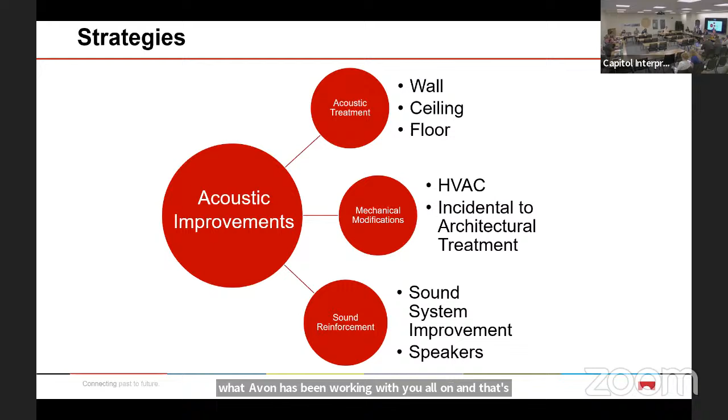If we add a treatment option to a wall or ceiling, there may be incidental repairs necessary to accommodate the new treatment. We also have sound reinforcement, which is a lot of what Avant has been working with you all on—sound system improvements, as well as some speakers we'll be showing here today as added to spaces.

One thing to get out up front: the goal of this workshop is to define the scope of work moving forward. We've outlined three key points to keep in mind. The first is we're able to utilize different pots of money to address different scopes of work, simplifying the number of rooms addressed in this workshop.

We'll go into that in more detail in the following slides, but Wendy already addressed that major maintenance is a pot of money that allows us to remove some of the rooms we had included in the report as a separate budget item.

The second key piece is the design team's recommendations have included considerations of acoustic performance, invasiveness, and impact. While ceiling treatment may require more invasive installation, it will have less impact in the long term. Again, the ceiling has the greatest impact on acoustics, and also the greatest impact on installation, since the ceiling has everything from lights to various mechanical and electrical systems.

Those systems would be incidental to what we installed, so that would take work, but over the long term it would pay off in benefit to the room. A third thing to note: if it's imperative that a reduced scope be considered, we advise completing fewer rooms per our recommendations rather than implementing partial solutions in many rooms. Rooms in which public business is conducted should be prioritized—we'll get into that more in the following slides.

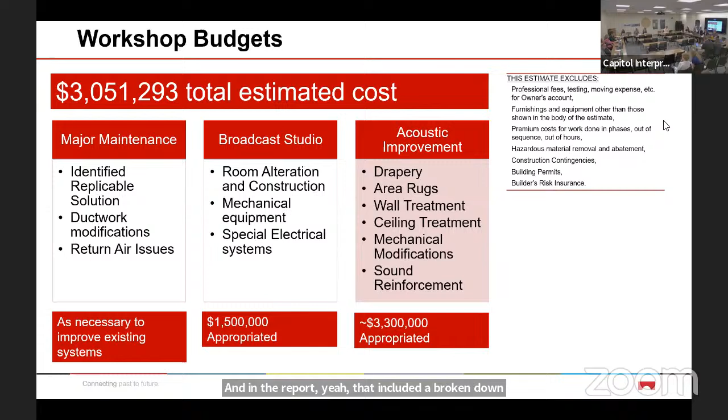So the major maintenance mechanical items, here are the list of rooms we were able to pull out of the report and begin to include that in a separate pot of money moving forward. We estimated this about 800,000 of that 3 million can be moved to the major maintenance fund source. Now, something important to note here is that all these cost estimates are adding in a 25% premium, just with the assumption that this may not happen all at once, but could be incrementally pieced together.

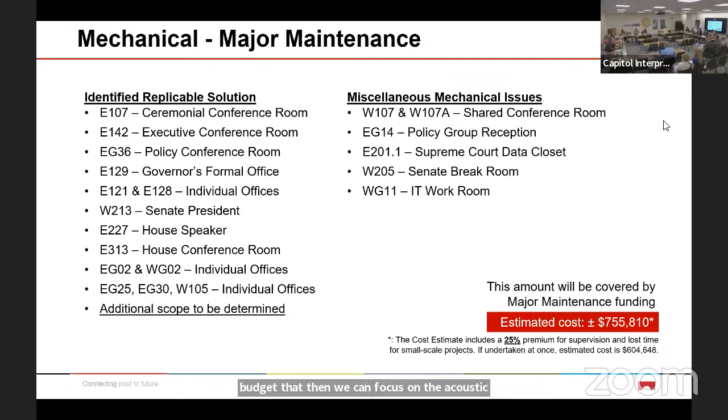So the next pot of money is that broadcast studio budget. This is another separate appropriation. Something to note here is that a lot of the design work is still yet to be done.

So we've taken a very basic approach to this space so far, without including any type of equipment that's special to the broadcasting studio. Our estimate included in that comprehensive report does give an item towards it, about 400,000 so far, but our estimated cost we're presenting here today is just going to be determined pending the scope moving forward.

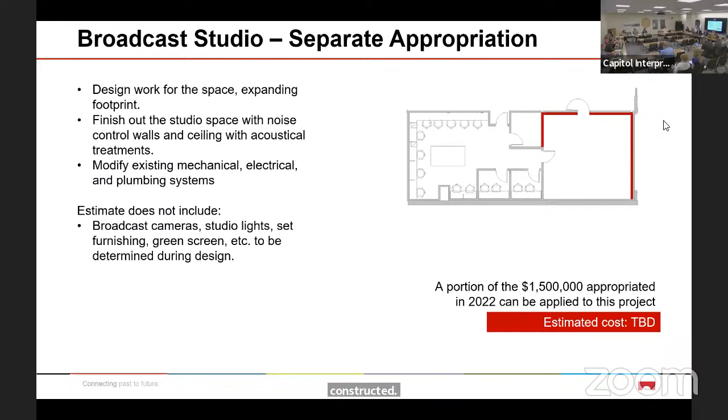But as we understand, it is a sure goal of the state that the broadcast studio is going to be included, designed, and constructed. So as we move forward with that design process, we'll be able to present a more conclusive cost estimate.

Which brings us to the acoustic improvement. The goal of this workshop here today is to go through these rooms.

In talking about the acoustic improvement, one thing we need to consider is the net impact of our treatment options. Our treatment options are things like the wall, ceiling, and drapery that we've talked about and shown in our benchmarking.

So when looking at a specific room, potentially stepping incrementally towards an acoustically sound room, doing something as small as drapery and rugs is not going to make as much of a difference. It's not going to have as much impact as, say, the wall or ceilings.

In many of the rooms we're going to talk about today, we're going to recommend doing just the ceiling. There are a few rooms where we do recommend each one of these be undertaken at once. But primarily, as I said earlier, our recommendation is going to be a complete system as opposed to a partial system in many rooms.

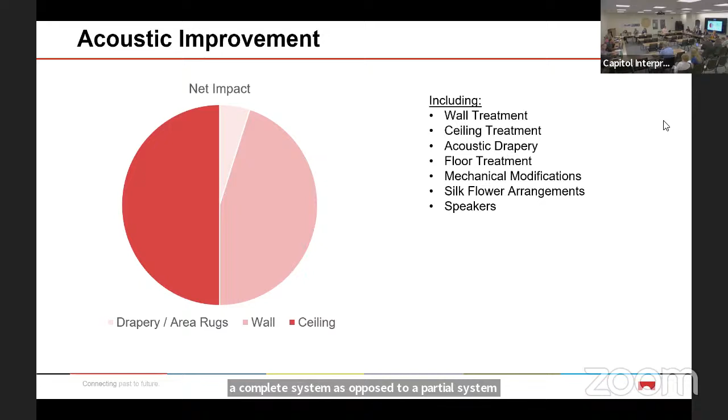So with that, the goal is to get as close to the ideal acoustics as practical. We'll have some slides in the future that Avant has put together, and if you remember in reports past, they had put together graphs showing the recommended target acoustics and the different lines of different options we had examined in the past.

Moving forward to conclude with our final recommendation on how to achieve the ideal acoustics, which may not be perfect—and that's something important to consider too, as we'll see in future slides. It may not be perfect, but it's going to be that balance that Todd mentioned earlier, where we're balancing quality, scope, and budget.

So to begin, we'll look at the Joint Appropriations Committee room. In this room, we have presented wall treatment, furniture mounted drapery, speakers, and then all the other incidental engineering building system modifications. So that room comes in at a cost of about $57,000.

And this is including all of our recommended acoustic treatments. So if this is all undertaken, again, that's what the rendering will look like, which we can hop back to if you would like.

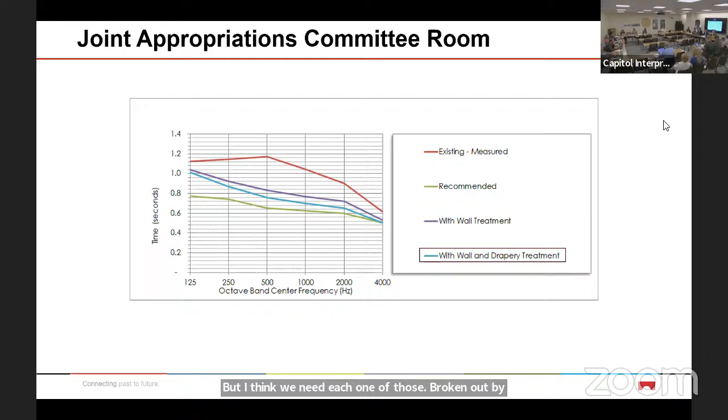So the next place is again the public meeting rooms. For these ones, we are recommending only doing the ceiling treatment.

Wall panels were presented as a potential option here, as well as window drapery. But this is one of the cases where ceiling is going to get the most bang for your buck. So while it is the most invasive option, you're going to have electrical, speakers, different modifications that will need to be made to the ceiling to accommodate the treatment.

In the long run, this frees up wall space. It's out of sight, almost out of mind, and it will be detailed in a way that you would hardly know it's there. And many of the benchmarking examples, I'll go back to some of these.

And so that's primarily why we recommend doing a ceiling when the option's available, because it becomes unnoticed in the long run. You'll have the impact on the acoustics, but not the visual impact you would if it were mounted on the wall. So here are the different options we looked at for that room and why we went with the ceiling treatment.

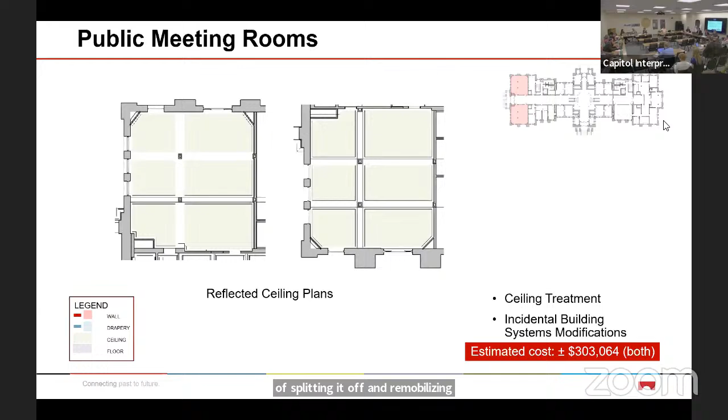So the wall treatment and ceiling treatment were for getting the square footage, the area of absorption required for the recommended reverberation time. The speakers were to increase sound intelligibility, and the railing modifications addressed reflection coming off the existing glass railings - non-historic but maintained - by replacing them with brass railings similar to those in the historic Supreme Court and elsewhere in the Capitol building, to remove that reflection coming from the gallery space.

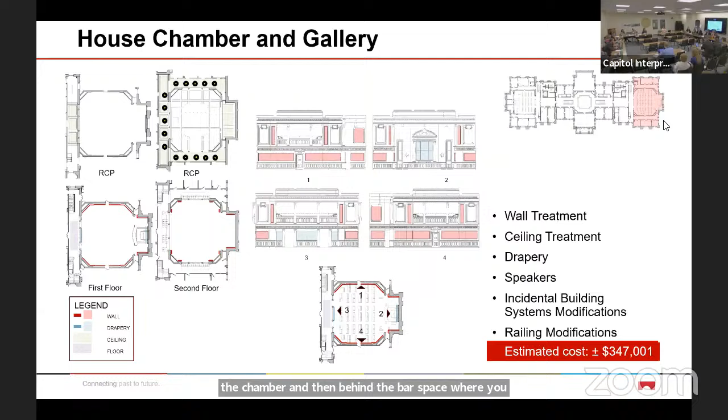And John, this is something you had - well, there had been some comments on seeing people on camera back there talking, and it being kind of distracting to the Zoom calls, the feed to the internet. So you could shut those curtains and not see them.

And it was our understanding, and Brandon, correct me if I'm wrong, that there was not a security issue. It wasn't like it was ballistic glass or anything like that. It was primarily an audio control component, or voice.

Yeah, Mr. Chairman, Representative Sherwood, it was actually debated quite a bit during the Capitol restoration project, and the glass itself doesn't provide any fall protection - if you leaned into it too hard, you would fall. The thought behind it was it provides perhaps a little bit of protection, since there have been instances in other states where people wanted to dump something into the chambers, but you could still reach over and do that even with the existing glass. And behind the bar area, during session, is controlled by the sergeant at arms and the doorman.

So I've got a couple of thoughts on that area we're talking about, one of my favorite areas in the Capitol. I think it's really impactful when you come through that first door and into that area. So I'm going to have to see where we would propose these draperies, because I really like that you can see through into the chamber, and closing that off in any way gives me a little pause. Maybe I'm the only one.

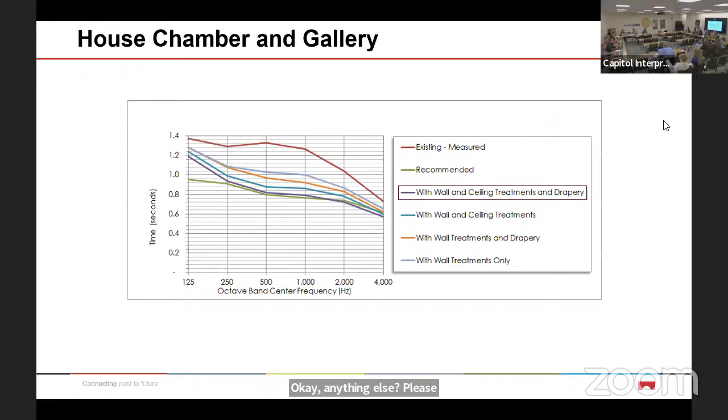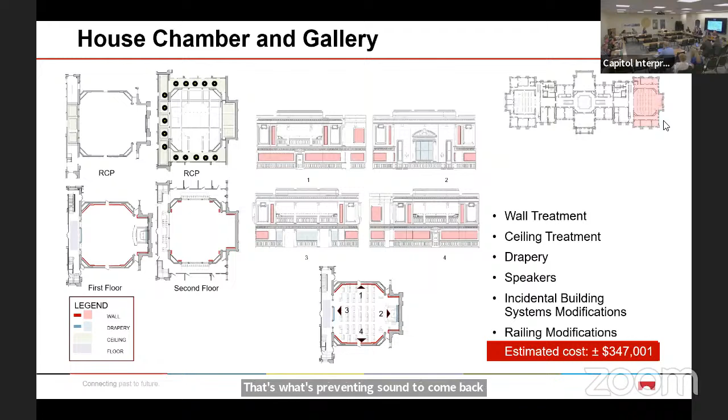This is one of the spaces where we considered options. This is definitely a recommendation, but if the drapery weren't installed, this is one of those where the ceiling should then be utilized for absorption. We believe this is the most prudent option. It's going to be the least invasive. It's just going to be a railing with the drapery hung from it, mounted behind that on the face of the wall in a way that isn't destructive to the architecture of the building, but it serves a crucial purpose of blocking those sound waves and helping prevent additional reverberation in the gallery space.

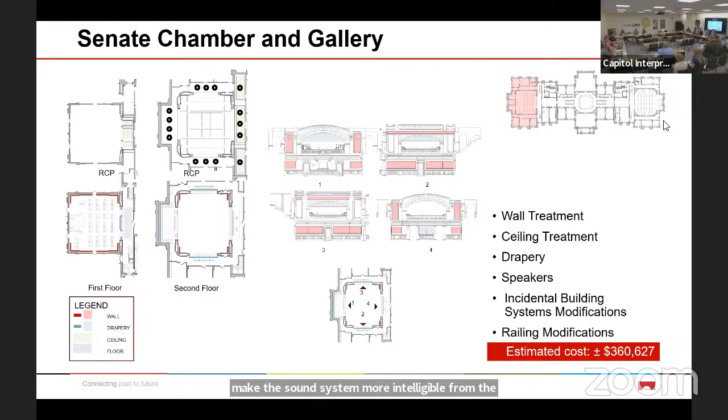Anything, committee? Okay, please proceed, gentlemen.

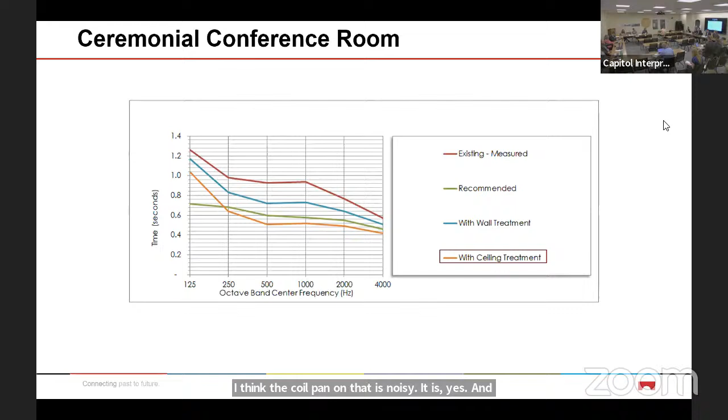I think the coil fan on that is one of the noisiest ones. It is, yes. And so that is again, maybe this is part of the discussion, but the major maintenance funding - this estimated cost, I believe, includes this room's major maintenance item. It hasn't been separated out in this estimated cost. So something to think about is that this may potentially be lower for the ceiling treatment option, but it does, in this case, include that replicable solution we've identified as a major maintenance item.

So in reference to that, we've got the two fan coil units in there. Does major maintenance go beyond that? Is there something that I'm not remembering in that room? They would be addressed in major maintenance. Yeah, that is our understanding at least.

Anything else, committee? Okay, please proceed, gentlemen. Thank you.

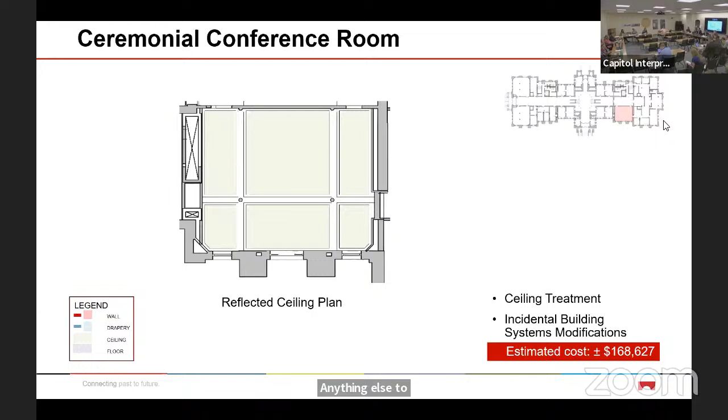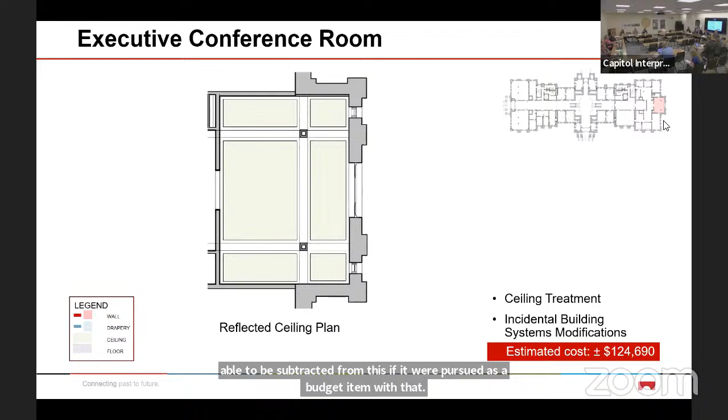Just further analysis showing that the ceiling treatment, while it performed almost as well as the wall treatment, this is one of the ones where it's basically a one-to-one choice where you're deciding, do I want to impact the wall, do I want to impact the ceiling? In this case, wall was used for picture frames, artwork, and everything else that would actually detract from the treatment. So this is assuming that the wall treatment is unimposed - it has the entire area for absorption, where the ceiling you wouldn't hang anything necessarily. So it achieves its acoustic value without impact from anything that would be added on after the fact.

Wendy, how do you envision this? Obviously the governor's office would have the sole determination on when and how to do it, if they want to do it. So how soon do we bring your office in as we do these evaluations, so that we're in sync? And with the chambers, I think it's the same thing. Essentially, that would be a management council call and the respective bodies' call on their individual chambers to some degree. At some point, obviously we need to give them a presentation, and so what we do is make a recommendation to those entities. Is that what you envision?

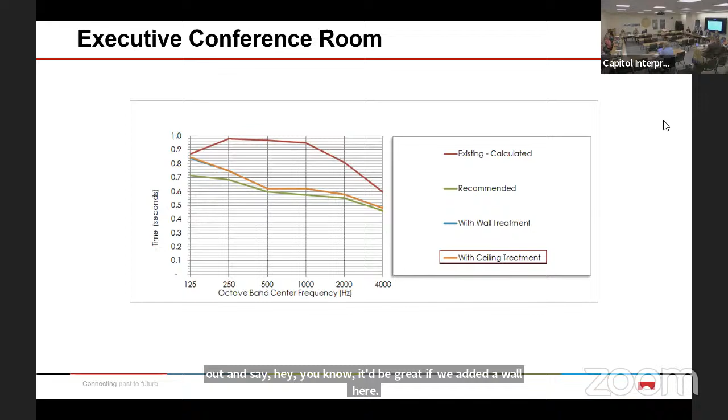The portion of statute that triggers the notification and involvement of management council and SBC is 9-5-106 E or F, I can't remember right offhand. That's the provision that any architectural change to the building - it's meant to protect so that somebody doesn't go out and say, hey, it'd be great if we added a wall here, we could put two offices, and kind of undo the work of this restoration project. So it's a little complicated. To Betsy's point, I think we need to dig in more about what's required, but any fan coil modification is just work GSD is doing in the building - there's lots of trades work at all times, really finish changes. But if you were to add a wall to a room, that's where they're trying to have these governance bodies say, hold up, let's think this through.

Yeah, I think the co-chairman and Wendy expressed that very well. Good points, Betsy, thanks for bringing that up. I would always lean toward the caution side on what we're up to, and I really like how this subcommittee has operated. I hope both branches of government feel that way. We've made good recommendations, but we've been careful to make sure we're going up through both channels, and hopefully we can continue that.

I think whatever we do on this acoustic front, we're going to find that we're limited. So our recommendation has to be to utilize what resources we have to the maximum - we can do that, in my opinion. I'd probably lean the committee toward taking care of the most important rooms that have been outlined today, rather than trying to do everything and spreading our resources throughout the building in areas that maybe don't get the high traffic or aren't utilized as much. So a little later this morning, that's kind of what we need to be up to, to give these gentlemen their next charge.

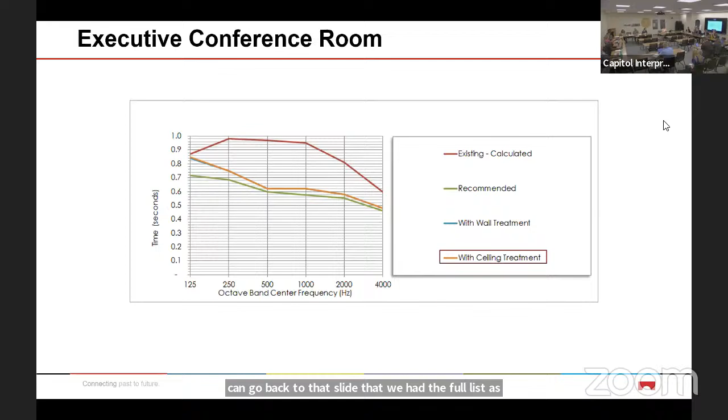We just have a couple more spaces we'll touch on this morning to show the individual estimated cost. Another room is the policy conference room - this is another ceiling treatment only option recommendation, and it's again going to have the incidentals that every other room with the ceiling has had so far. I can go through these a little faster since they're getting repetitive, but the graph shows that the ceiling treatment was the most prudent and thus the recommended option.

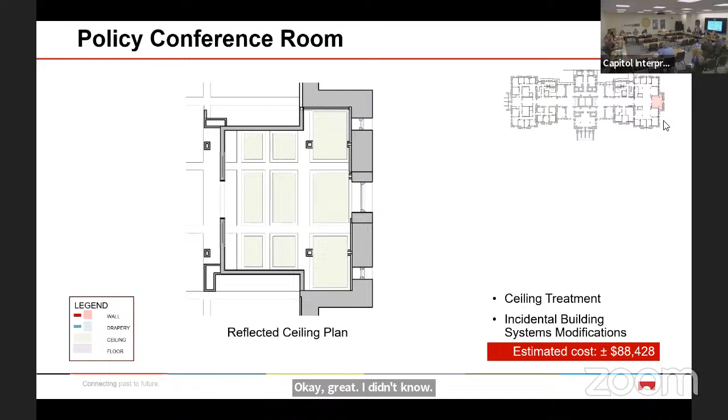The governor's formal office - sorry, could we pause? Betsy, is the policy conference room the one on the garden level? Okay, great, I didn't know what it was called. Okay, sorry Madam Chair. No problem, thanks for asking the question.

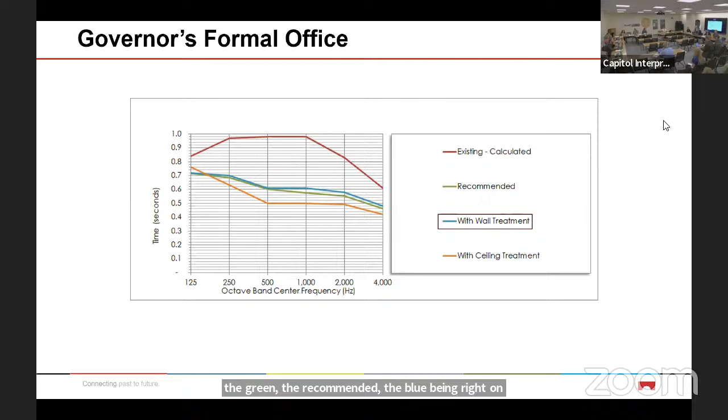The governor's formal office is an area we had actually identified as preferring to include wall treatment as opposed to the ceiling. This will need to be potentially re-examined moving forward with our details, and it may make more sense to instead do the ceiling option. As you can see here, it was something they were working very similar in their improvement to the space. Maybe something to note is how high that existing calculation was, and I think what I've heard this morning is that's anecdotally true, that the spaces do not function acoustically quite well. Here you can see the green being recommended, the blue being right on it, and the orange being beyond what's recommended. Perhaps in this case it was a balancing budget consideration that was made, but ceiling may again be examined for this room moving forward.

Mr. Chairman? Yeah, please. In that room, the wall treatment space you've outlined, at least half of that has TV screens on it, two TV screens. I just wondered if that means the wall treatment is not as effective. Yep, this may have just been a quick decision that was made that didn't examine that. Initially, this room actually was not considered in the report.

And so it was an after the fact calculation that we were able to make to then inform our recommendation. So we were going off of limited data, and moving forward, we will increase the amount of data that we consider in this room.

Mr. Chairman, just so you know historically and for future use, this room was the governor's conference room, and the conference room was his office. Within a week of moving in, he flipped the two rooms. He found that the office was too ostentatious, so he flipped it, but I could see where another governor might want to flip that back and make this room the conference room and the other room his or her office. But that is why there are two TV screens in there, because it was thought to be a conference room.

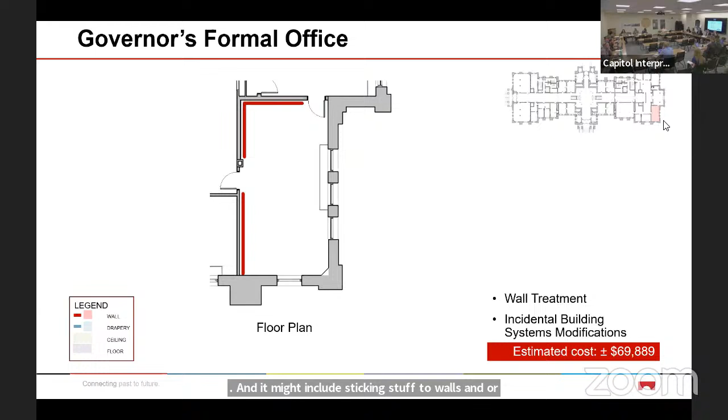So the last three spaces we're going to be looking at are primarily in the corridor spaces of the Capitol, and then the extension. These are the House and Senate lobbies, of which we have recommended installing area rugs in each of these spaces. It will minimally impact, of course, your tile that you have, and they're very decorative, very beautiful tile. But we can design it in a way that contributes to the space as opposed to taking away from what that tile brings to it.

How much do the rugs help in those spaces? The rugs, since there's essentially no absorption there now, do provide some benefit.

We talked about these kind of corridor areas. I think early on, we had looked at the full ceiling plaster treatment, and it was kind of already identified that these are less critical, and we wanted to just pare back to something kind of minimal and inexpensive, so the rugs were kind of the path we were proceeding down.

You could go the green shag on one end and then the orange shag on the other. Yeah, color coded. Shag is better. Yeah, the thicker the better. 3-inch pile, I think. Yeah. Shag is much more absorbing, right? Yes, definitely. Gonna throw that out.

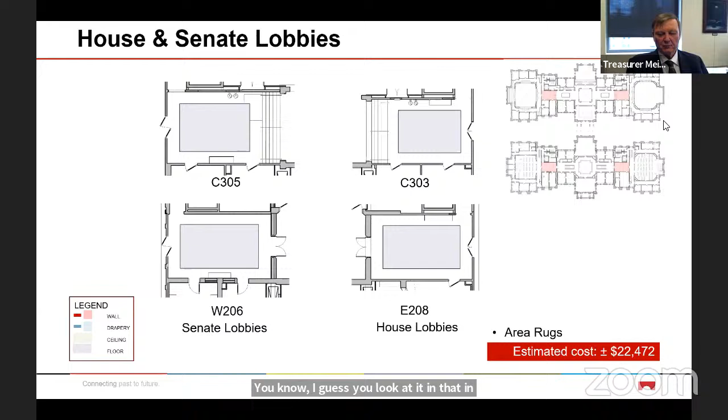Treasurer Meier, good points made. Gentlemen, if you could take that under advisement, I think we'd be interested in that. Any further thoughts on lobbies? Okay, please proceed.

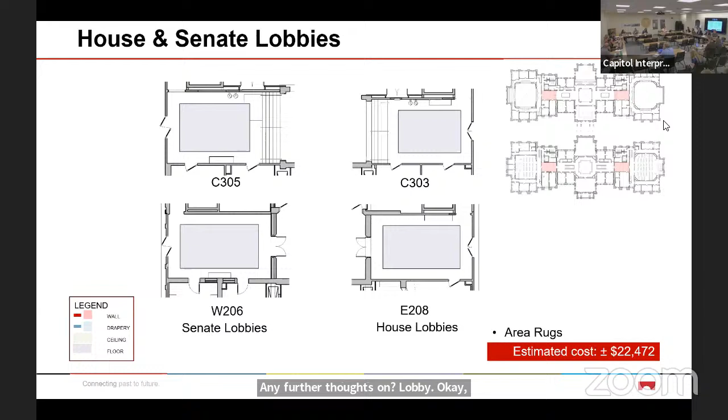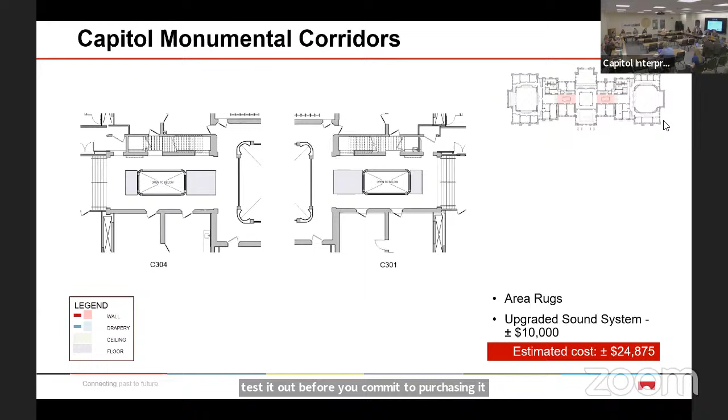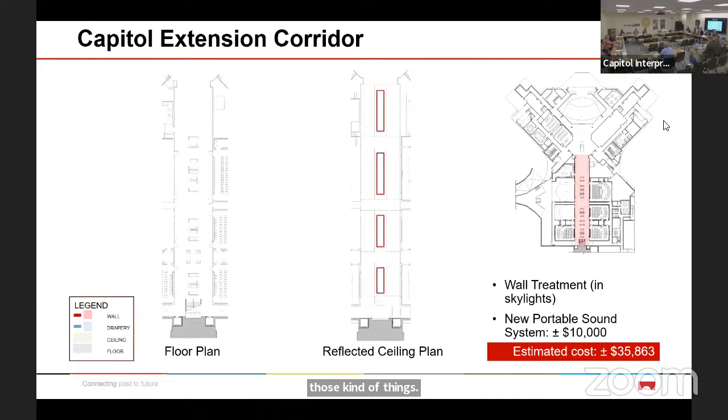What else? Please proceed. Well, that brings us to the end of the slide. So if you guys want to go back, I can head back to the initial slide where we brought out each room and the total estimated cost.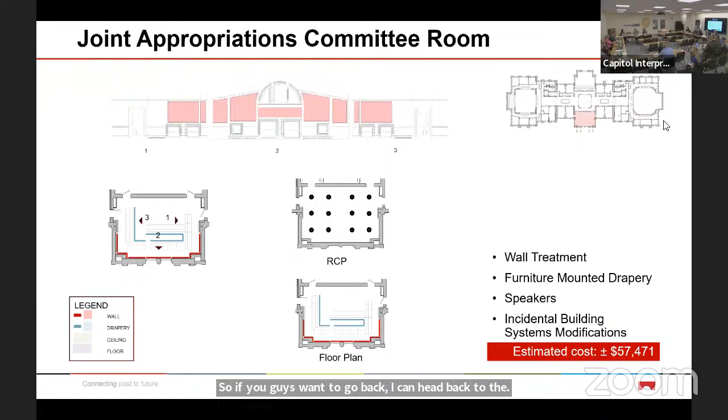So here, what I think we need to establish is the important rooms we are going to prioritize in this scope moving forward. After hearing out each one of these spaces' considerations that we've made and outlined in the comprehensive report, what I believe is crucial today is beginning to prioritize the spaces where the public business occurs, and any other space we deem necessary in this initial scope.

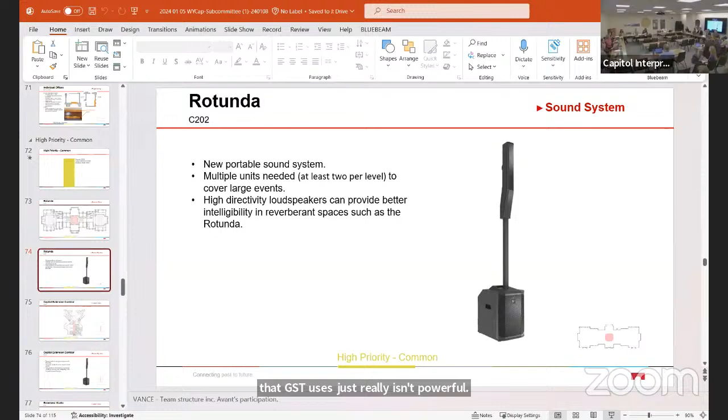Mr. Chairman, I can give you a little background on what's needed. This would be only used for special events in the rotunda, as well as special events in the extension, and surprisingly, there's more and more of those. The little sound system in the podium that GSD uses now just isn't powerful enough. My understanding from John is these mobile speakers could be moved throughout different floors of the rotunda and are scalable based on the size of the event. I believe we also looked into whether they could be used for outside events.

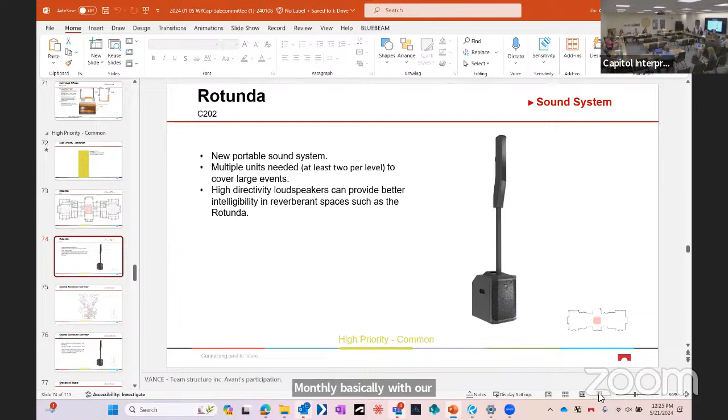So John, we have some meetings scheduled going forward, monthly, basically, with our subcommittee, so I like the idea of maybe being able to test one of these. Is that something that is doable?

Yeah, I think there's probably... let me just re-summarize what we have up on screen that we found. So this is a typical kind of modern portable sound system. It utilizes a base unit that has the amplification and processing in it, and then there's this column speaker on a pole. This is one example; there are many manufacturers that make these. They're very good at...

speech intelligibility in reverberant spaces. So even in the rotunda especially, and also in the extension corridor, these would be really good at covering a crowd for special events. As Wendy pointed out, multiple units can be daisy chained together to create larger systems. In the extension, that's probably just two of these, maybe flanking the stage or podium. In the rotunda, you're probably putting one or two of these at every level to cover the corridors on either side.

So in terms of a mock-up or a test, we could try to set up a demo where the manufacturer brings their product in and shows what it can do. The other option is, for your next event, instead of using the speakers you have on hand, you rent a system that utilizes something like this and see if that performs better. Then, knowing that you do these events enough, you may purchase those units for the future and not rent every time, because of economy. So those are probably the two routes you could take, or you could do both—get the manufacturer to come in and demo it, and then do a rental and see how you like it.